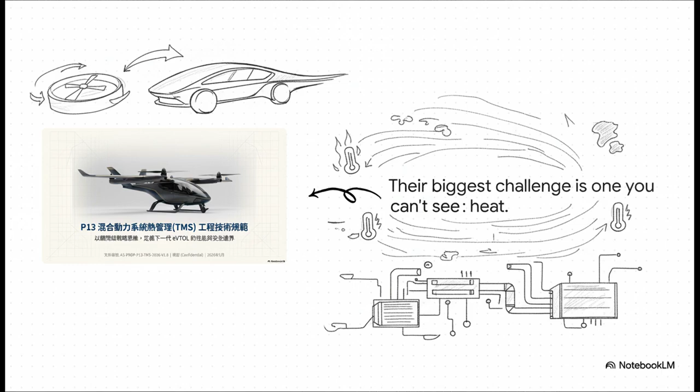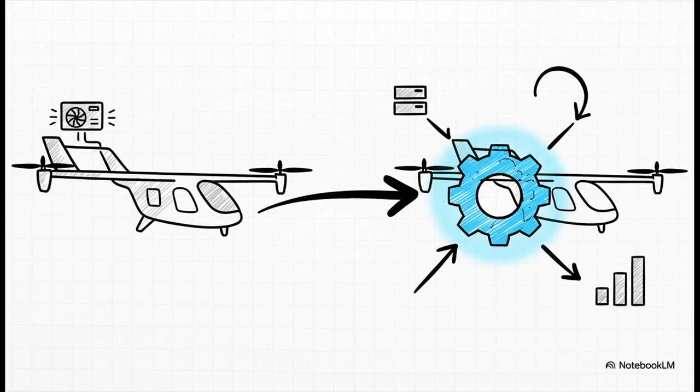So the first thing we had to do was completely change our mindset. In this new era of flight, you have to understand that thermal management is no longer just a support system, like the AC in your car. It is the core performance enabler. It's the thing that decides your payload, your range, and whether you're even commercially viable.

Now, what's really fascinating here is the fundamental physics of the problem. A jet engine, right? It runs incredibly hot. That creates this huge temperature difference with the outside air, which actually makes it pretty easy to cool. We call that high-grade heat. But our eVTOL powertrains, well, they're super efficient, which is great, but it means they produce low-grade heat. The temperature difference is small, making it fundamentally, physically harder to get rid of.

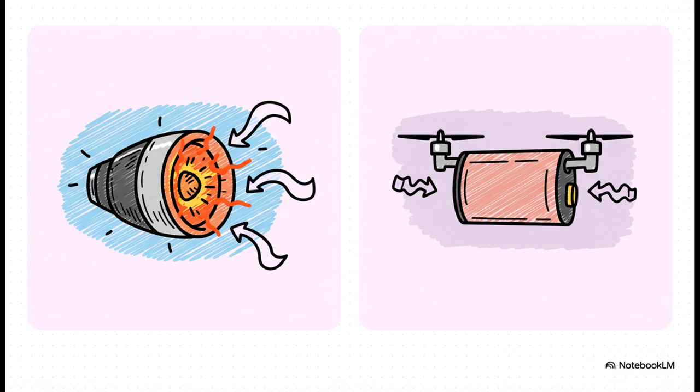And look, this isn't just some abstract engineering puzzle we're trying to solve for fun. A projected growth rate of nearly 18% year over year tells you everything. This is a multi-billion-dollar race. The company that solves the heat problem first wins. And that's exactly why we had to architect a solution that was, well, perfect.

So that brings us right to the heart of our challenge with the P13 hybrid system. From an architectural standpoint, the problem was unlike anything we'd faced. We had to manage two totally conflicting physical realities on the exact same aircraft. We started calling it our ice and fire problem. And this diagram, wow, it shows that conflict perfectly.

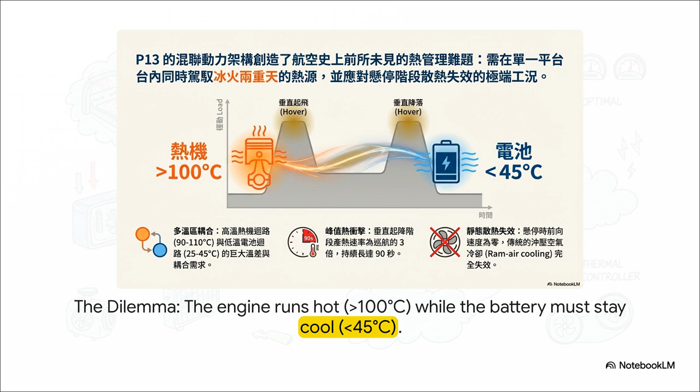During takeoff and landing, when you need the most power, the engine is scorching hot, way over 100 degrees Celsius. At the exact same time, the high-voltage battery has to be kept chilled, below 45 degrees for safety. And the real kicker? This all happens during hover, when you have zero forward airspeed, making traditional air cooling completely and utterly useless. So how on earth do you solve that?

Well, we attacked it with a top-down, MECE approach that's mutually exclusive, collectively exhaustive. Basically, we broke the problem down into its smallest pieces to make sure we addressed every single variable without anything overlapping. This led us to our solution, a dual-fluid, tri-loop system that physically separates the problems so we can solve each one in the best and safest way possible.

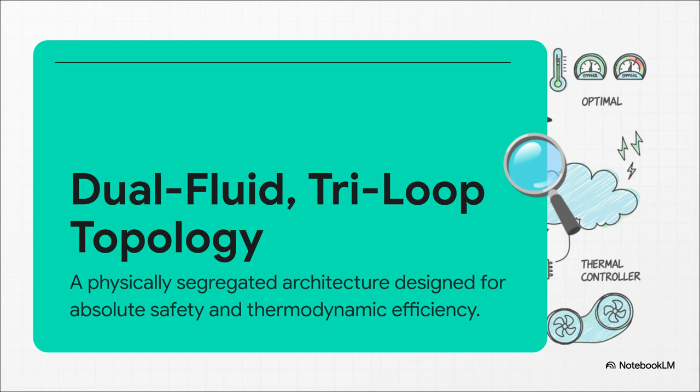Okay, let's look at the actual blueprint and see how it all fits together. We designed 3 completely independent loops. The high-temperature loop cools the engine using a standard ethylene glycol mix. But, and this is critical, for the mid-temp loop cooling the electronics and the low-temp loop for the battery, we use a specialized, non-conductive dielectric fluid to guarantee electrical safety.

Now, the safety principle behind that fluid choice is absolutely key. For our 800-volt battery system, we don't just circulate the fluid around it. We mandate full immersion in this dielectric fluid. It's basically a non-conductive oil. Why? It's simple. If there's ever a leak, it physically cannot cause an electrical short. We've engineered the risk of a coolant-induced fire right out of the system from day one.

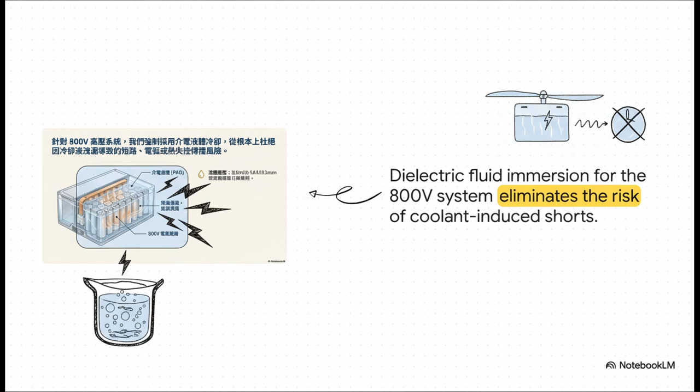But what about those massive heat spikes during takeoff? For that, we use a couple of advanced tricks. First is something called tab cooling, where we pull heat directly from the electrical tabs on the battery cells, right from the source. Second, we can integrate an optional phase change material, or PCM. The best way to think of it is like a thermal sponge. It's a solid wax that melts, absorbing that huge burst of heat, and then safely releases it later as it turns back into a solid during the much calmer cruise phase of flight.

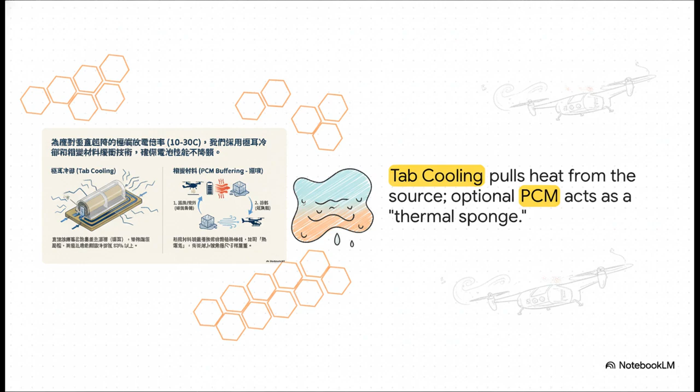And you have to understand, our design does so much more than just cool things down. It's an intelligent system. It performs peak load rejection to survive those brutal takeoffs. On a freezing day, it preconditions the battery, warming it up from minus 20 degrees to operational temp in less than 20 minutes. And it even performs after-run cooling to protect the engine's sensitive turbocharger bearings long after the pilot has shut everything down. This system is a true performance enabler.

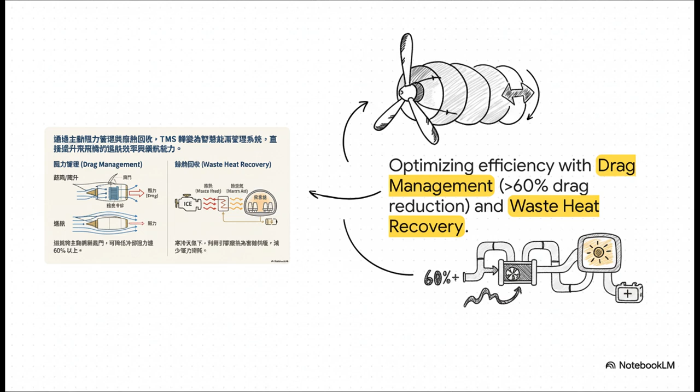It's not just dead weight. Through active drag management, it actually reduces the aircraft's cooling drag by over 60% in cruise, which saves a ton of energy. And with waste heat recovery, it recycles that waste engine heat to warm the cabin, saving precious battery power that you'd otherwise have to burn on heaters.

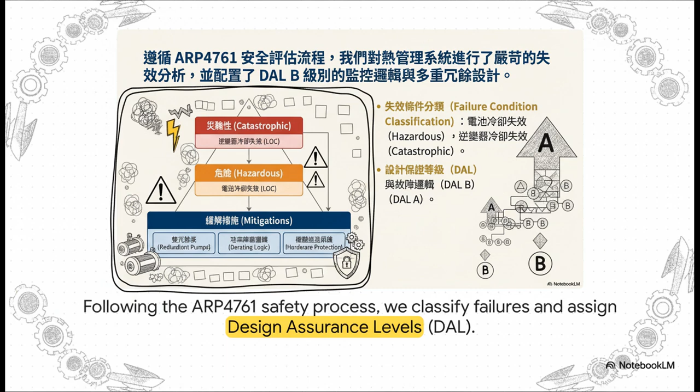Okay, let's talk about the part that really matters, certification. Safety is completely non-negotiable. We follow the aerospace industry's incredibly strict ARP 4761 safety process. We analyze every single thing that could possibly go wrong. For instance, losing battery cooling, that's classified as hazardous. But losing inverter cooling, which could mean losing thrust, that's catastrophic. Each of these is then assigned a design assurance level, or DAL, which dictates exactly how rigorously it must be designed and tested. And we don't just hope it works, we prove it meticulously through a 3-step validation process.

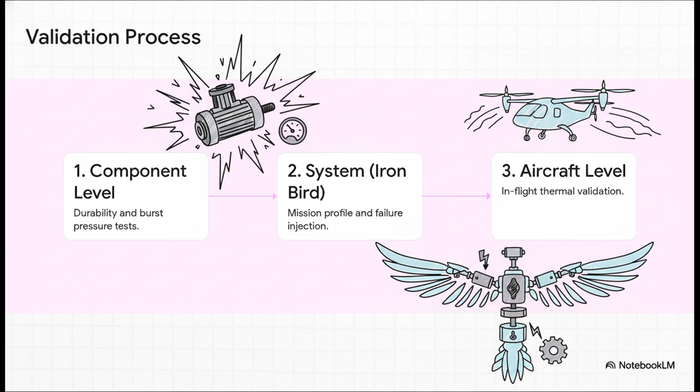We start at the component level, testing a single pump until it breaks. Then we move to the system level on a ground rig we call an Iron Bird, where we run full mission simulations and intentionally inject failures to see what happens. Only after it passes all of that does it ever get to fly on a real aircraft.

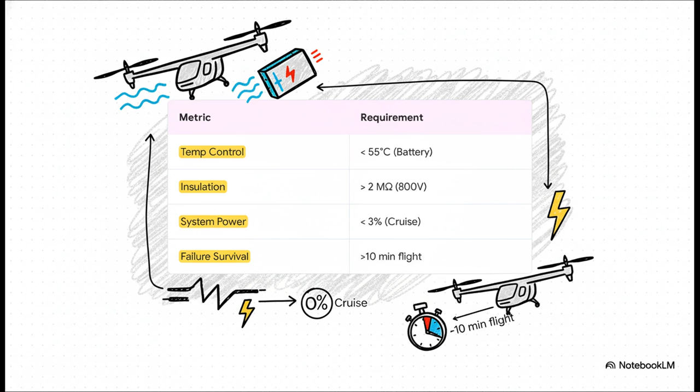So to be perfectly clear, this blueprint isn't just some collection of cool parts like tab cooling or dielectric fluids. It is a fully integrated, strategic system. Every single component, every line of software is architected to work together as one certifiable solution, designed for performance, efficiency, and above all else, absolute safety.

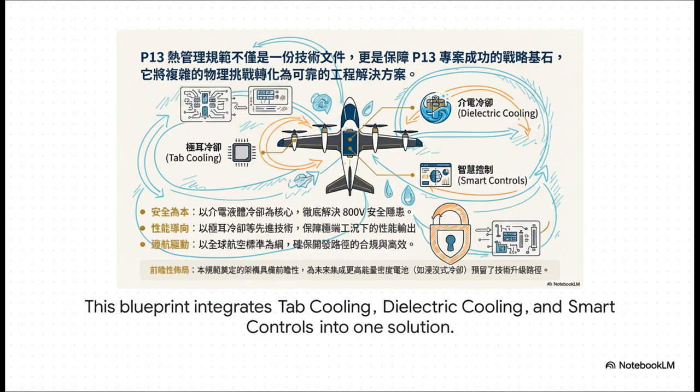Ultimately, this is the kind of deep systems engineering that builds the foundation of trust and reliability needed to make urban air mobility a real thing. It's disciplined blueprints like this one that will finally answer the question not if we'll have air taxis, but simply when you'll be seeing them in the skies above your own city.